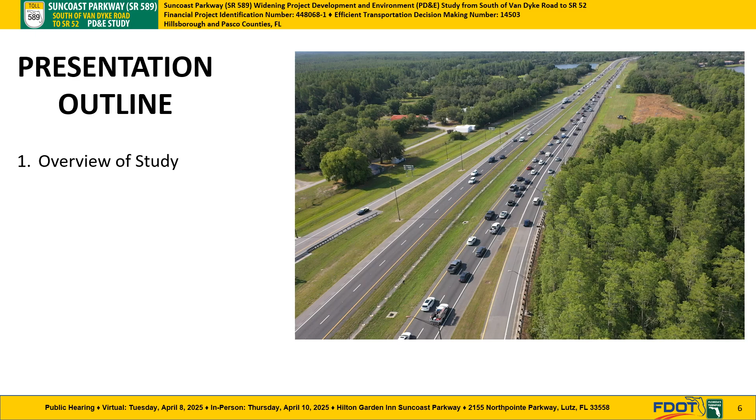The remainder of this presentation will provide an overview of the study, project needs, and our community involvement efforts. We will then review the preferred alternative and potential environmental effects, both beneficial and adverse.

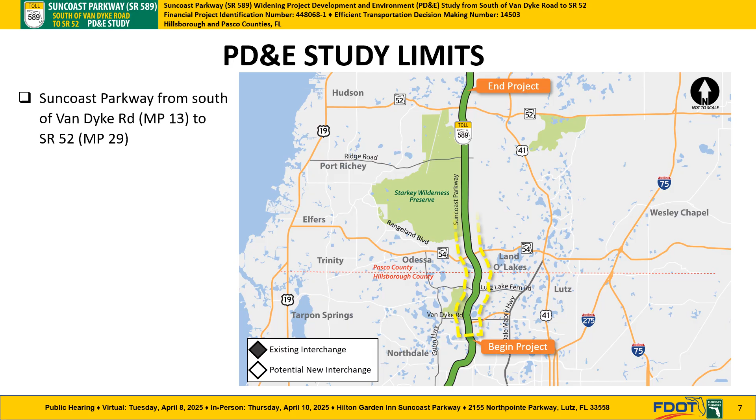The study limits extend along the Suncoast Parkway from south of Van Dyke Road at milepost 13 to State Road 52 at milepost 29. The project is located within both Hillsborough and Pasco counties. There are 5 existing interchanges within the study limits. Pasco County is currently evaluating extending Rangeland Boulevard across the Suncoast Parkway. This PD&E study also includes evaluating one potential new interchange at Rangeland Boulevard, as requested by Pasco County.

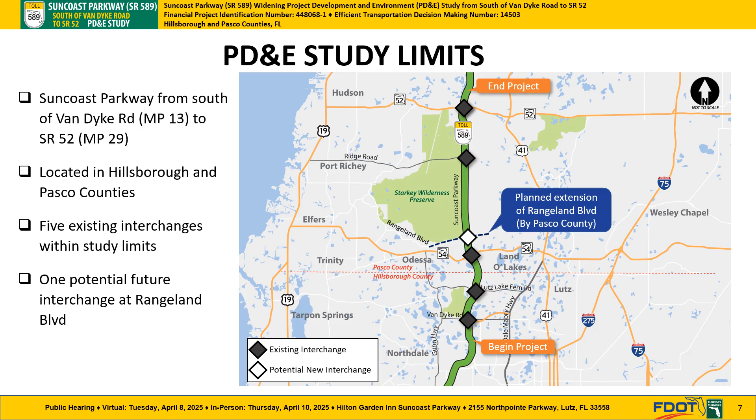The purpose and need for a project provides a basis for developing, considering, evaluating, and eliminating project alternatives. The project purpose and need are to accommodate year 2050 travel demands, enhance safety, improve travel time reliability, and enhance emergency response and evacuation.

In 2000, the population within Hillsborough and Pasco counties was just over 1 million people, and it more than doubled by 2023. The population within the 2 counties is forecasted to be over 2.8 million people by the year 2050. With the project located within a rapidly growing region, travel demands on the Suncoast Parkway are expected to increase by 70%. If nothing is done, the existing roadways in the study area would not be able to accommodate the expected increase in traffic.

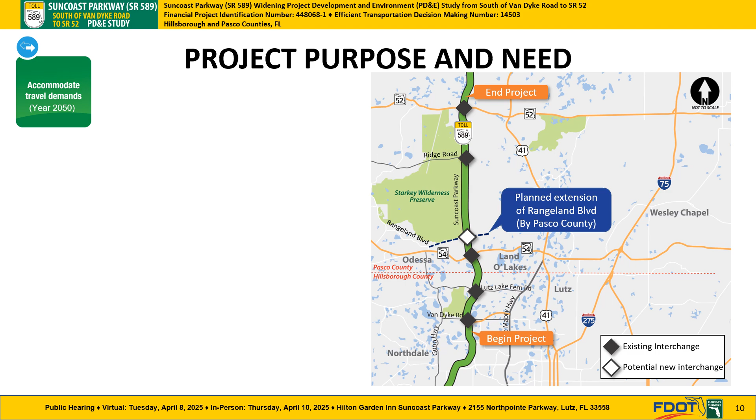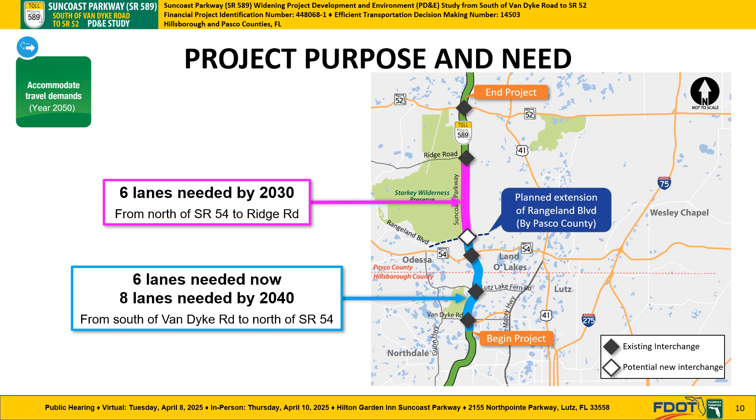Improvements to the Suncoast Parkway are needed to accommodate year 2050 travel demands. In order to accommodate this demand, 6 lanes are needed now from south of Van Dyke Road to north of State Road 54, and 8 lanes will be needed by 2040. From north of State Road 54 to Ridge Road, 6 lanes will be needed by 2030. From Ridge Road to State Road 52, 6 lanes will be needed by 2035.

Improvements to the Suncoast Parkway are needed to enhance safety. Between 2018 and 2022, there were approximately 1,045 crashes within the study limits, equating to an economic cost of $145 million. If nothing is done, increased congestion will lead to an increase in crashes.

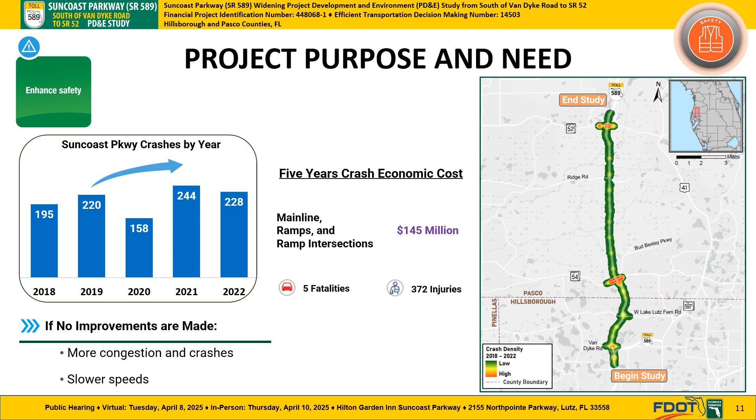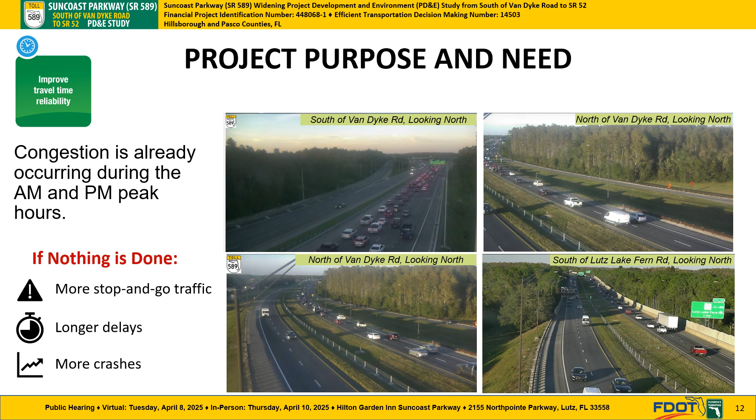Improvements to the Suncoast Parkway are needed to improve travel time reliability. Currently, there is congestion during the morning and afternoon rush hours along the Suncoast Parkway and at the State Road 54 interchange. The proposed improvements are expected to reduce travel times during peak periods. And finally, improvements are also needed to efficiently process large volumes of traffic during emergency evacuation events.

Serving communities is at the center of everything the Florida Department of Transportation does. During the development of this project, the enterprise has engaged adjacent communities and stakeholders in the project's decision-making process. In February of 2024, over 2,400 newsletters announcing the start of the study were distributed to residents, property owners, and interested parties. An alternatives public information meeting was then held in June of 2024, where project alternatives were presented. Approximately 100 people attended the alternatives public information meeting, and over 40 written comments were provided to the project team.

Community feedback is at the core of all we do. The Florida Department of Transportation works with the public to balance their community vision with the community's transportation needs. This is routine on all of our projects to ensure Florida's infrastructure is safe, resilient, and efficient for many years into the future. This includes coordination with local governments and agencies to receive input that was incorporated into the preferred project alternative.

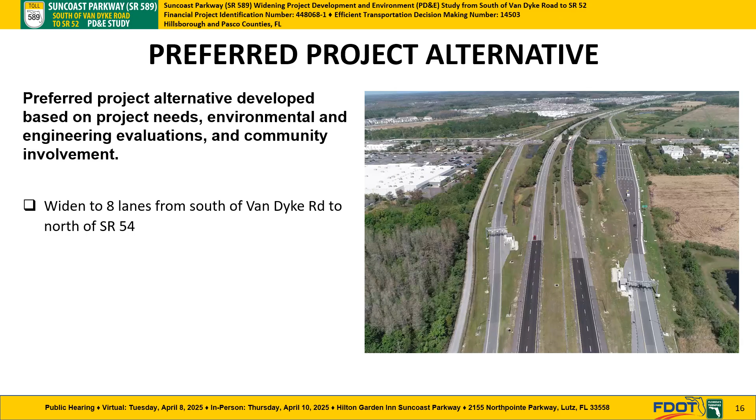A preferred project alternative has been developed based on the project needs, environmental and engineering evaluations, and community involvement. The preferred project alternative would widen the Suncoast Parkway to 8 lanes from south of Van Dyke Road to north of State Road 54, widen the Suncoast Parkway to 6 lanes from north of State Road 54 to State Road 52, improve existing interchanges, and accommodate a future interchange at Rangeland Boulevard.

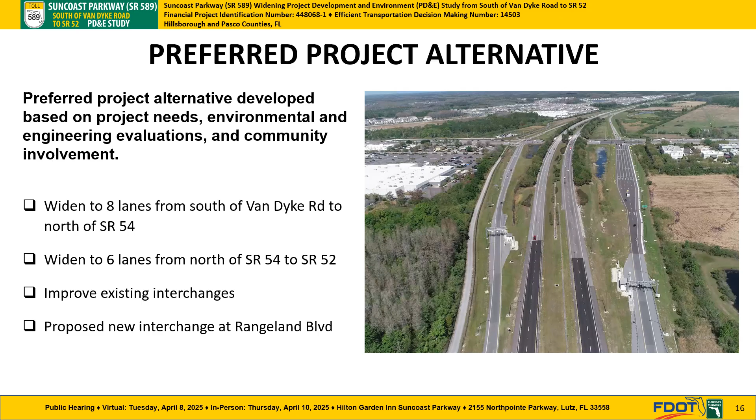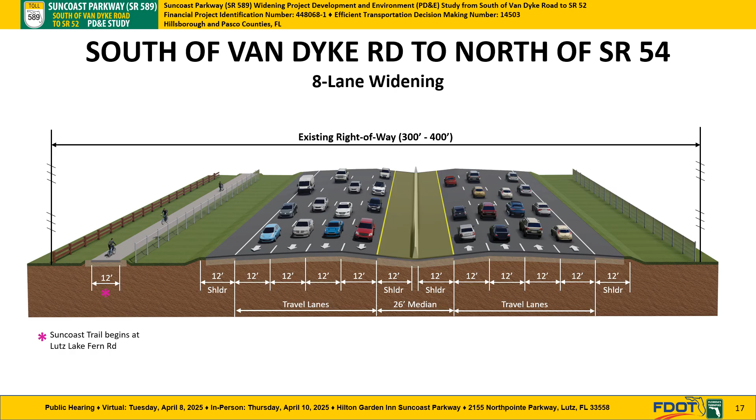From south of Van Dyke Road to north of State Road 54, widening to the inside and outside is proposed to include 4 12-foot wide travel lanes in each direction, separated by a 26-foot wide median with a barrier wall.

From north of State Road 54 to State Road 52, widening to the inside is proposed to provide 3 12-foot wide travel lanes in each direction, separated by a 40-foot wide median.

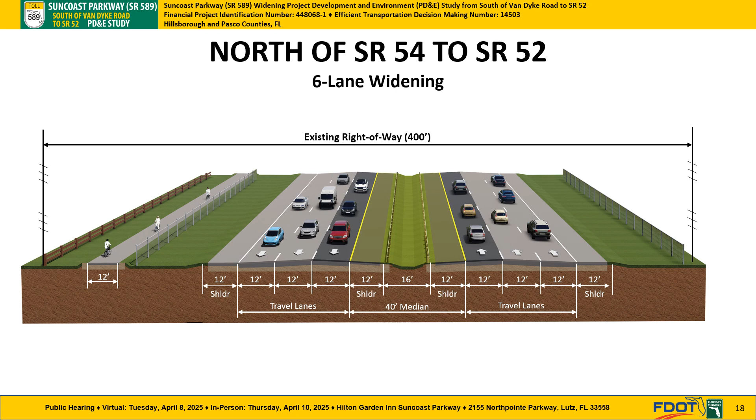Now we will cover the details of the preferred alternative related to the 5 existing interchange locations. After, we will discuss the ongoing planning efforts around a potential new interchange at the future Rangeland Boulevard.

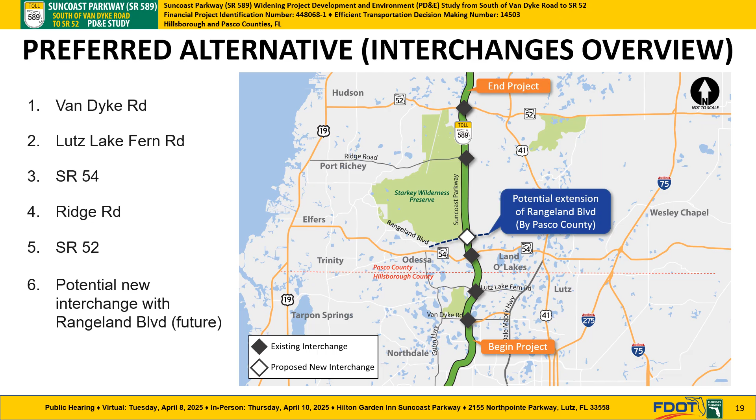At the Van Dyke Road interchange, the preferred alternative includes adding an additional left turn lane to the northbound and southbound off-ramps and adding a turn lane along Van Dyke Road in the westbound direction to Ramblewood Road.

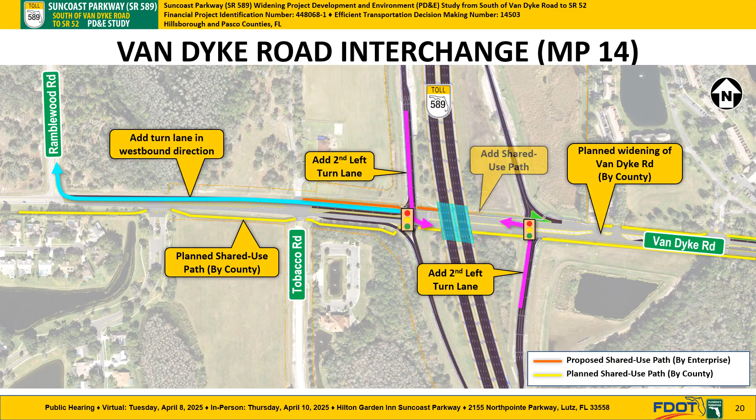Hillsborough County is currently planning improvements to Van Dyke Road that includes adding a shared-use path through the south side of the interchange. Proposed interchange improvements will accommodate the county's planned shared-use path. In addition, a shared-use path on the north side is proposed as part of the interchange modifications.

At the Lutz Lake Fern Road interchange, the preferred alternative consists of minor modifications that includes adding additional turn lanes and extending turn lanes at the intersections. In addition, a shared-use path is proposed within the interchange area on both sides of Lutz Lake Fern Road.

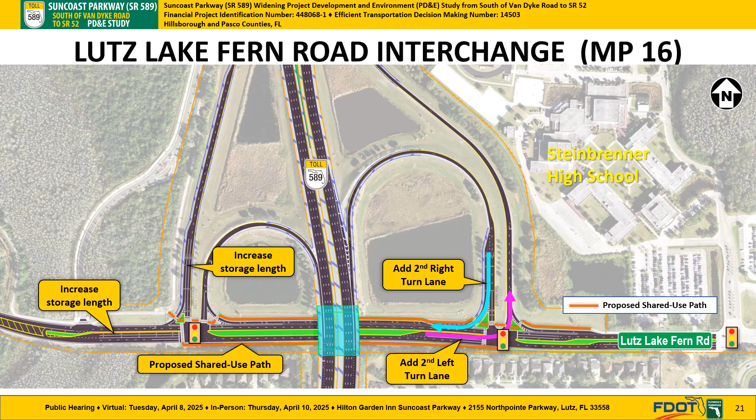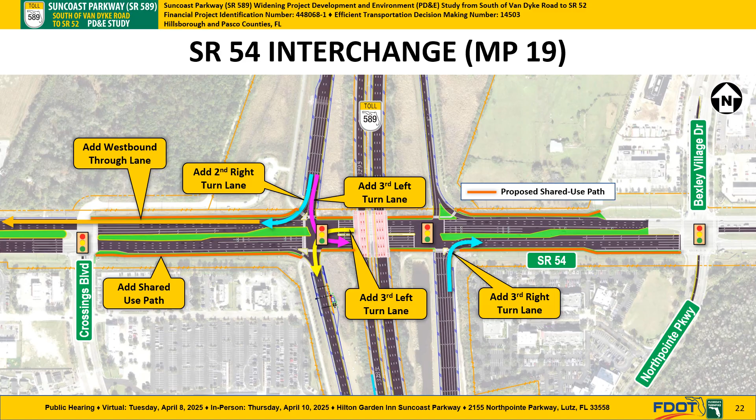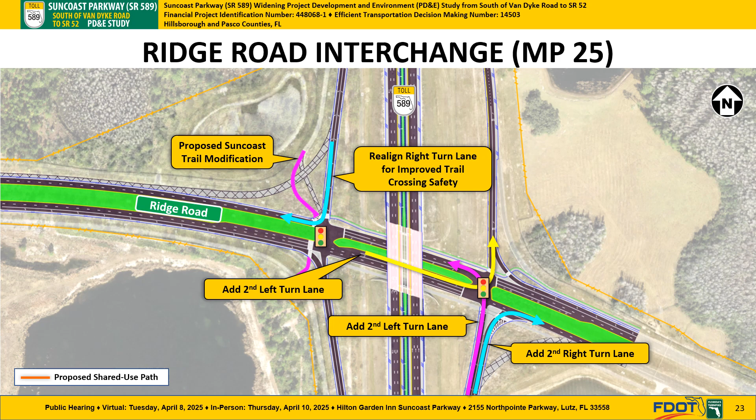Improvements include adding a shared-use path on the north side within the interchange area.

At the State Road 52 interchange, the preferred alternative includes adding a left and right turn lane to the northbound off-ramp and adding a second right turn lane from eastbound State Road 52 to the southbound on-ramp. Improvements would also include a shared use path on both sides within the interchange area.

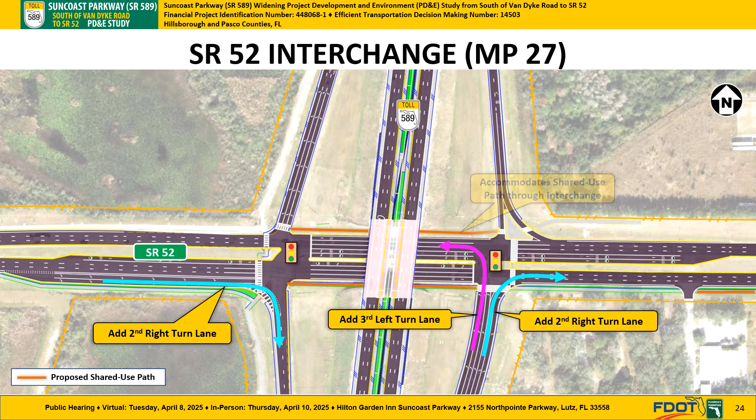We will now discuss the ongoing planning and development of a potential new interchange with the future extension of Rangeland Boulevard. When considering any new interchange connection, Florida's Turnpike Enterprise adheres to the following criteria.

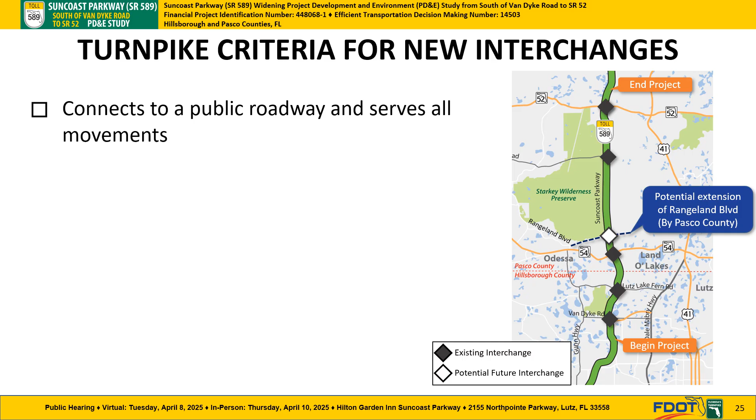A new interchange must connect to a public roadway and serve all movements. The interchange must meet safety and operational requirements. The interchange must be supported by the local community—we place a high priority on projects that are welcomed within the communities we serve. And finally, the interchange must be consistent with local government plans and priorities.

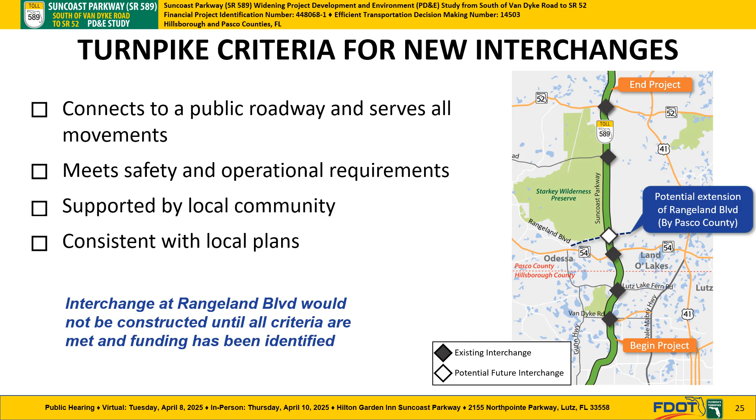The preferred alternative includes adding a new interchange at Rangeland Boulevard. However, a new interchange would not be constructed until all criteria are met and funding has been identified. We will now review the interchange concept developed for Rangeland Boulevard.

At Rangeland Boulevard, the interchange concept includes loop ramps on the north side of the future Rangeland Boulevard. The southbound off-ramp would include 2 left turn lanes and a single right turn lane. 2 left turn lanes would be provided from westbound Rangeland Boulevard to access southbound Suncoast Parkway.

The northbound off-ramp would include 2 left turn lanes and 2 right turn lanes. A single left turn lane would be provided from eastbound Rangeland Boulevard to access northbound Suncoast Parkway.

Accommodating the northbound ramps involves a need for additional right-of-way from the adjacent parcel, as shown in yellow. The addition of a new interchange would also require some minor modifications to the alignment of the Suncoast Trail.

Trail users would go under the Rangeland Boulevard Bridge, cross the intersection on the west side through a crosswalk, and then continue around the interchange ramp to the north as shown.

As a reminder, an interchange at Rangeland Boulevard would not be constructed until the previously discussed criteria are met.

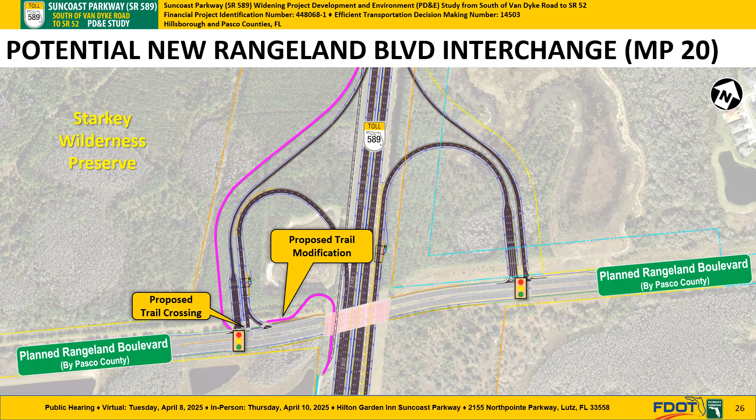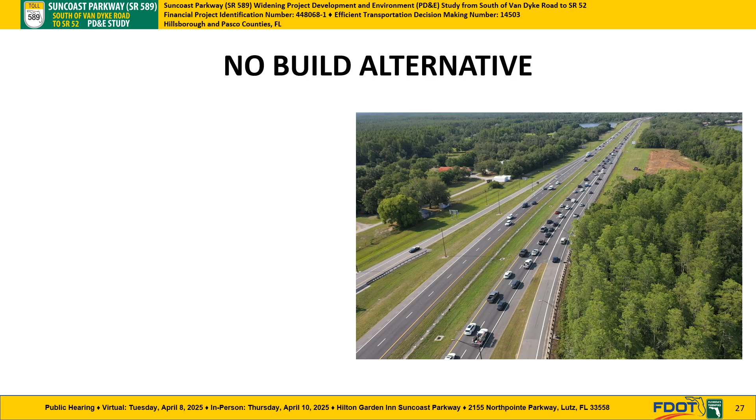As part of every PD&E study, the no-build or no-action alternative is considered. The no-build alternative describes the conditions that will occur if the mainline widening or interchange improvements are not built.

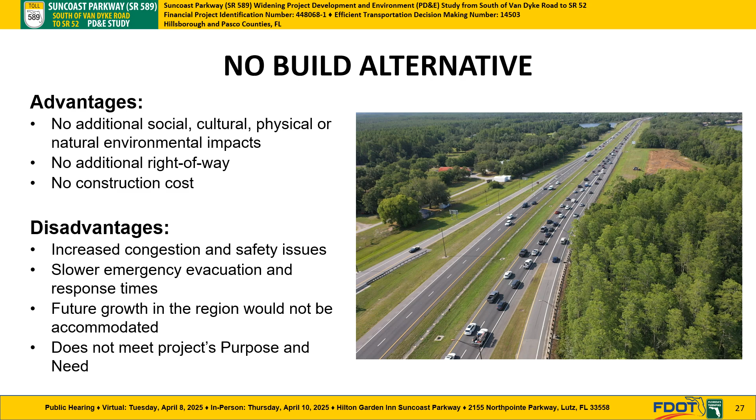Advantages include no impacts to the social, physical, or natural environment, and no additional right-of-way or construction costs. Disadvantages include increased congestion and safety issues, slower emergency evacuation and response times, and future growth in the region would not be accommodated. Selection of the no-build alternative would not meet the project's purpose and need.

When comparing the no-build alternative versus the build alternative, the build alternative eliminates mainline backups, reducing Suncoast travel time by 17% between Van Dyke Road and State Road 52. With the project access enhancements, signal delay within the study area decreases by 43%. The build alternative also reduces congestion on local roads, such as State Road 54.

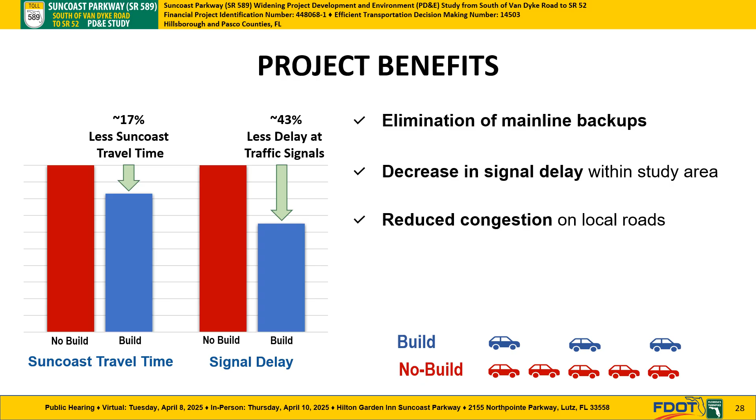The build alternative will reduce future crashes, resulting in a potential savings of $36.2 million over 20 years. Quality of life will also be improved, with reduced congestion and commuting time, improved air quality and accessibility, and reduced noise pollution with the addition of noise walls.

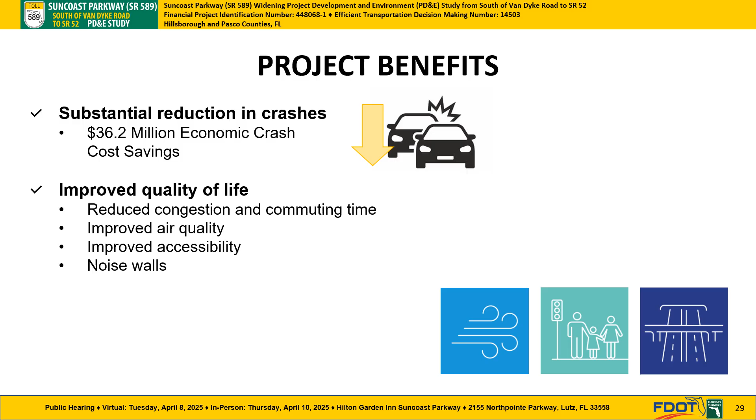We encourage you to visit the project website to view detailed exhibits of the proposed improvements.

There are 2 areas of the project with a potential need for right-of-way or additional land. The first is a 1/4-acre sliver of land adjacent to the bridge over TPC Boulevard, and the second is 18.7 acres of land in the northeast quadrant of the proposed Rangeland Boulevard interchange. Please refer to the display boards for more details.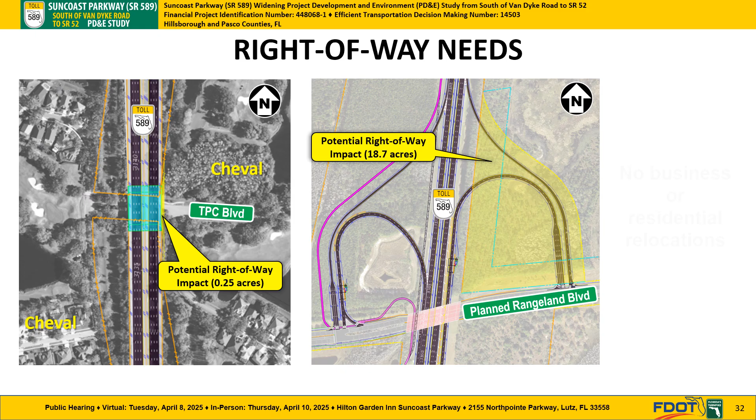The right-of-way needs for this project will not result in any business or residential relocations.

A cultural resources assessment survey was conducted for this PD&E study to identify any cultural resources and assess their eligibility for listing in the National Register of Historic Places. No archaeological sites eligible for listing were identified. 4 historical resources were identified, but determined not to be eligible for listing. No significant impacts are anticipated as a result of this project.

Federal protected species may be present or utilize areas within the proposed project. The project may affect, but is not likely to adversely affect, the eastern indigo snake, Florida scrub jay, and wood stork. Florida's Turnpike Enterprise will request technical assistance with the United States Fish and Wildlife Service, USFWS, on the project during the permitting and design phase regarding the regulations for these protected species and mitigation measures.

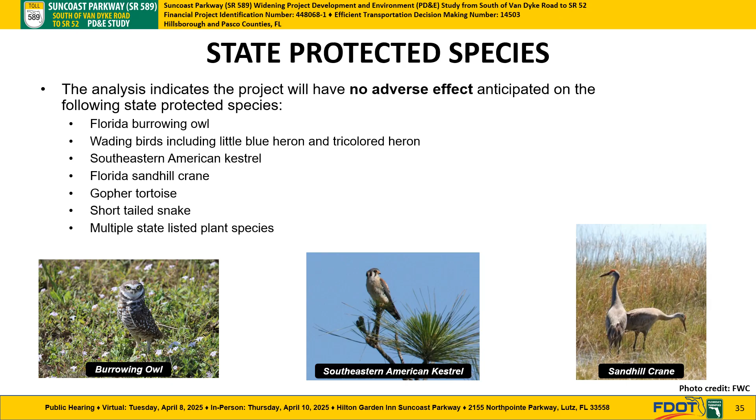State protected species may be present or utilize areas within the proposed project, but no adverse impacts are anticipated. Florida's Turnpike Enterprise will continue coordinating with the Florida Fish and Wildlife Conservation Commission regarding these species.

There are 6 existing wildlife crossings within the study limits. All existing wildlife crossings will be maintained, and opportunities to enhance will be considered during the design phase.

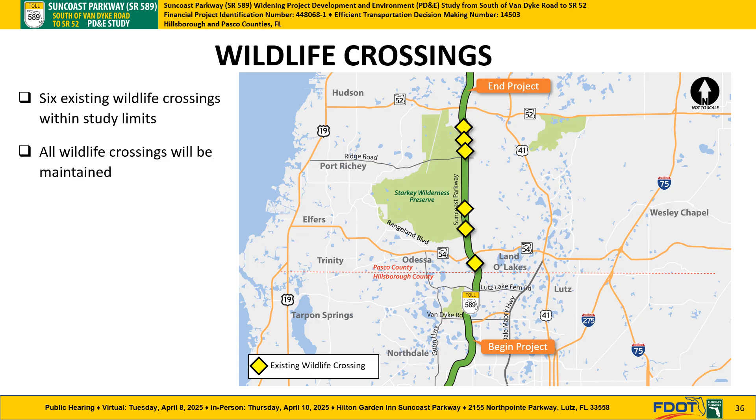The proposed roadway and stormwater pond improvements will potentially affect an estimated 6.15 acres of wetlands and 0.6 acres of surface waters. Florida's Turnpike Enterprise will mitigate wetland and surface water impacts resulting from this project's construction to meet state and federal requirements. Final pond site locations will be determined in the design phase.

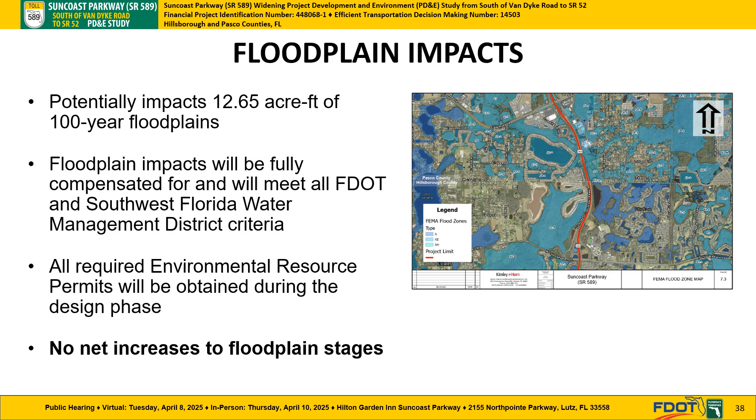A location hydraulics report was prepared for the project to identify potential 100-year floodplain encroachments resulting from the proposed improvements. Floodplain impacts will be fully compensated for, and there will be no net increases to floodplain stages as a result of this project.

A contamination screening evaluation report was prepared for this project to identify contamination concerns within the study area. The results identified no high-risk sites, 6 medium-risk sites, 15 low-risk sites, and 2 no-risk sites for the roadway and stormwater pond improvements. These sites will be further evaluated during the design phase to identify options to avoid, minimize, or mitigate contamination involvement.

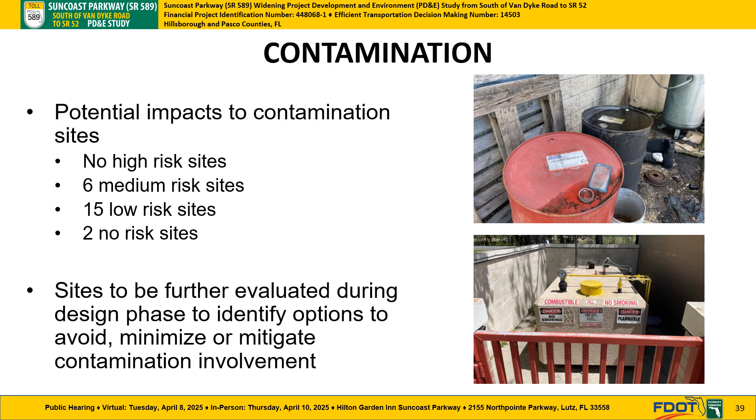A noise study report was prepared for this project. Impacted locations throughout the corridor were found to be potentially feasible and reasonable for noise walls. These locations are proposed for future study during design and can be seen in the noise study report prepared for this project. For more detailed information on the proposed improvements, including potential noise wall locations, visit the display boards located on the project website and at the in-person hearing, where a noise specialist will be available to answer your questions.

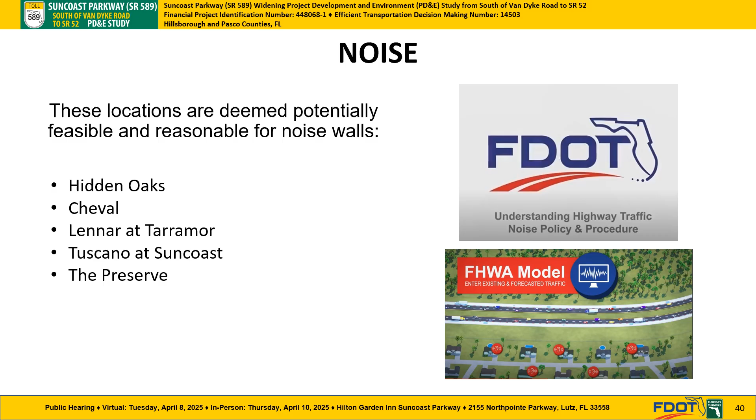The potential locations for noise barriers are outlined on the project exhibits. The legend included on each exhibit depicts the potential feasible and reasonable noise barrier locations as light blue, as shown here.

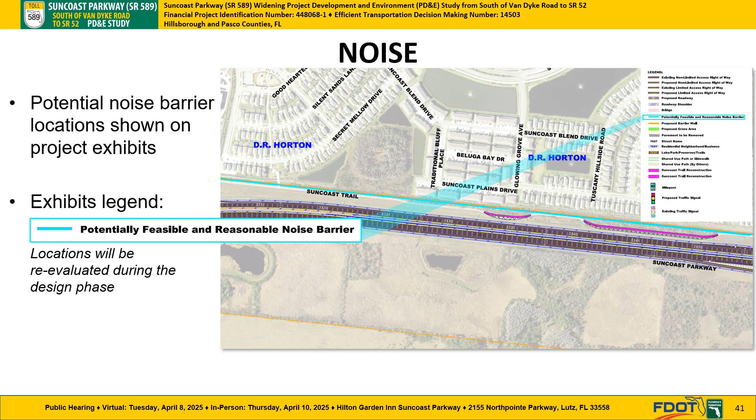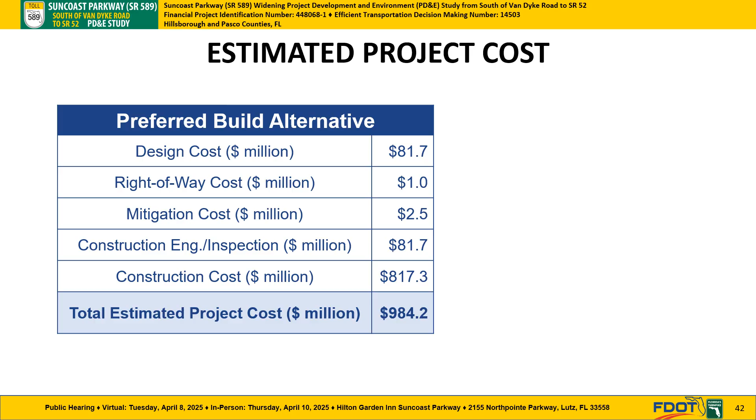The total project cost for the preferred alternative is estimated at approximately $984.2 million in present-day costs. All project-related costs are included in this total estimate. Pending completion of this PD&E study, the design phase for portions of the proposed project is funded. There is currently no funding for right-of-way or construction.

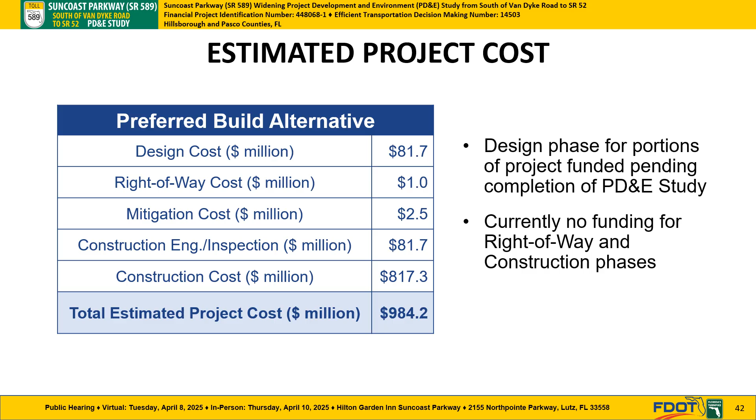The evaluation matrix compares the preferred project alternative to the no-build alternative and is on display and available for review.

We continue to encourage public input to help us make this important decision. You can submit written comments at the project website, www.suncoastparkwaypde.com, or you can mail or email your comments directly to the project manager, Greg Moore. During the in-person hearing, you can also submit your written comments using the comment forms provided. Written comments must be received no later than April 24, 2025, to become part of the public hearing record.

The next step is to incorporate your input on this public hearing into our decision-making process. After the comment period closes and your input has been considered, a decision will be made, and the final PD&E document will be approved. This project has and will continue to comply with all applicable state and federal rules and regulations.